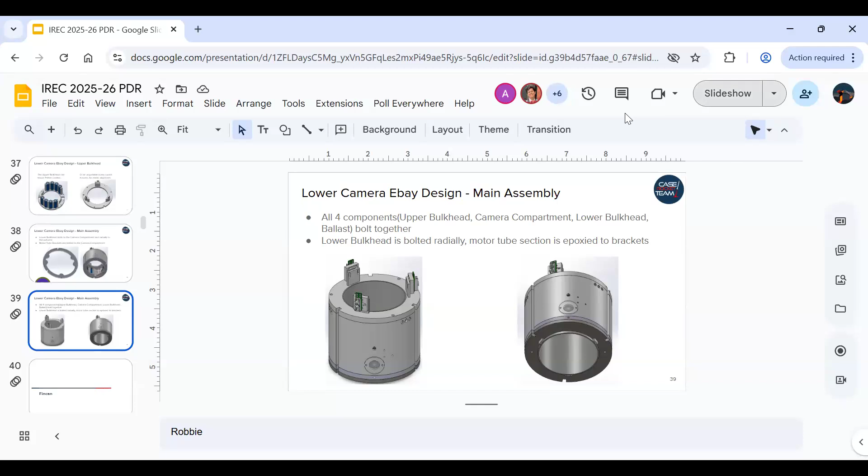Oh, just because the way it's big. Yeah, I can decide what you. Wait, let the color television. Why? You can click it with my laptop. Okay, so I'm still wait, if you join on your laptop, you also join here, right? Oh, okay. It's like oh, yeah, wait.

Okay, so this is a unique requirement. For those of you that don't know, we are now required to do shear modulus determination for our fins. So this is our plan of action for that. We are going to use the ASTM D7078, which is designed to determine shear modulus of composites. So pretty good for us. This is kind of a rough idea of what it looks like.

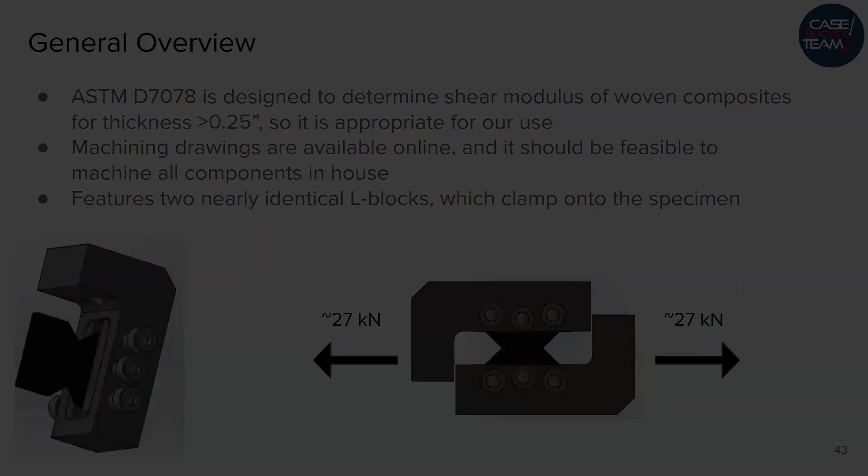And then here are the required forces. Max force, load cell, machine, from some conditions. Anyway, so for a 0.35 inch thick specimen, rating force is 25.2 kilonewtons.

And then what we're going to do this with is the fins from last year - there's leftover carbon fiber plate, or carbon fiber layup, on top of the G10 sheet. We're going to use that because we would use a similar fin material this year. So we're going to use that, and then we'll do a layup on top of it, a thick slab of carbon fiber, in order to see which one is stronger, and then which one is stronger onto the rocket.

But as mentioned, it'll probably go away. Probably go away. All right. I don't know, I'm good, yeah. The height that everything's happening now.

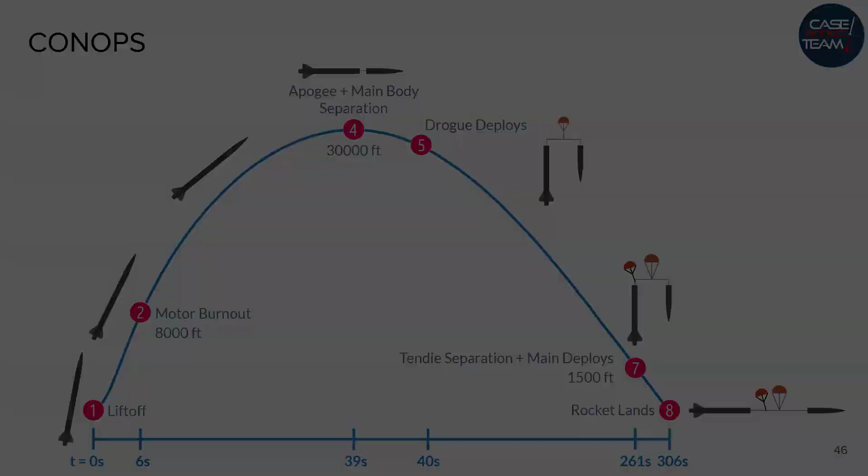Here's the recovery scheme. So it's gonna launch - that's what it's gonna look like, all one rocket. Then when it hits apogee, the floating charge is gonna pop open, shear pins are broken, nose cone's gonna come off, and then the drogue's gonna deploy, and then it's gonna descend to 1,500 feet. The tender descender, the EMAX and the tender, are gonna pop the ends out, releasing the main parachute. Then it'll have a safe landing.

Yeah, cool. So this is just basically the numbers of the flight. We have an apogee of 31,000-ish feet, going Mach 1.69, and 471 feet per second squared. The rest of the numbers you guys can read - I'm not going to read out every number.

One thing to note is in the DTEG, they now specify stability based on percent length of your rocket, not body calibers, because I think a lot of us are still very intuitive to body calibers. I did the conversion for you. So we'll go over this in the compliance matrix, but the minimum for supersonic flights is 10% and the maximum is 25%.

So we are within that. We actually end up having the opposite problem, because we were overstable and had to come down. But yeah, and this is also calculated based off OpenRocket - it's calculated based off no wind. That's how they said to do it, in the DTEG, how I said.

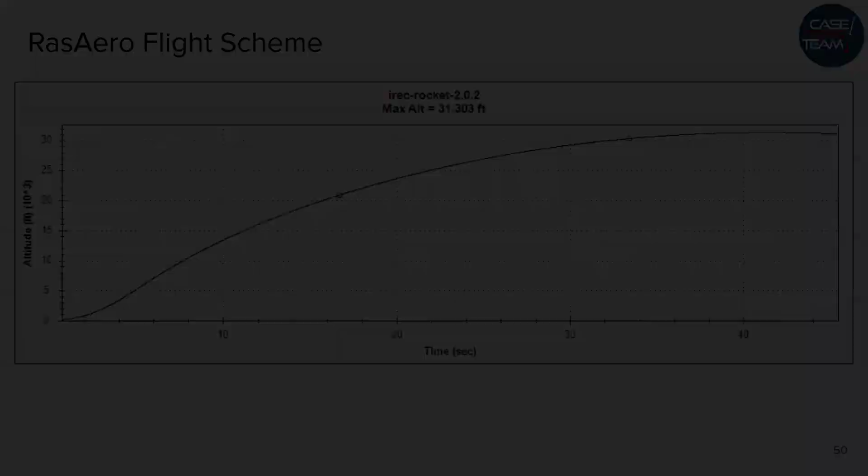This is gonna be a bunch of graphs. So this is all of the rocket's flight scheme, with wind - like accumulated Midland with all of the averages of June. This is the flight scheme: altitude, vertical velocity, vertical acceleration. I'll let you look at it for a sec. Then this is OpenRocket - the altitude from OpenRocket, the velocity, and the acceleration.

Fin flutter calcs, these are the inputs. The main takeaway is we have a 1.58. These are the inputs, you want to stare at them for a sec. The semi-span is calculated based off of, we say off into 6 inches, but because the boat tail is slanted, it's 6 inches plus whatever the slant is gonna be, so we calculate based off of the maximum value that it could be. So it's 6.828.

But yeah, these are our inputs. Go back. Anything specific to me go?

Before I continue, the main takeaway is we have a factor of safety of 1.58, which our minimum required is 1.5, so we're chilling on fin flutter. Hopefully. No, we're chilling on fin flutter, don't worry about it.

We also have more fin analysis. This is CN alpha - I realized in putting this out we didn't explain what CN alpha was on a full slide, so here's the slide view. It's basically the slope of thought - CN alpha versus the angle of attack. It quantifies the magnitude of restoring force the fin gives based off of how steep your angle of attack is, like how the force is pushed back.

A larger value is preferred since we want to be able to push the rocket back up to being straight. The general rule of thumb is vicinity above CN alpha of 10. The graph is CN alpha versus Mach number. We can see the graph here, and we are not going above Mach 2 or anything, so around halfway here we stop, and as you can see for all the Mach numbers we're gonna hit, you're above 10, so we're good.

Here's the dynamic pressure of the rocket. Maximum dynamic pressure, also known as max Q, is 140 kilopascals. This is important to know because this is where we think EOS went wrong last year. These are just graphs of dynamic pressure over time and dynamic pressure versus altitude, but I also have velocity at which we hit max Q. I'll stay on the slide for a second.

Hello. Alright, so the one tapping is here. Is that you, Karen?

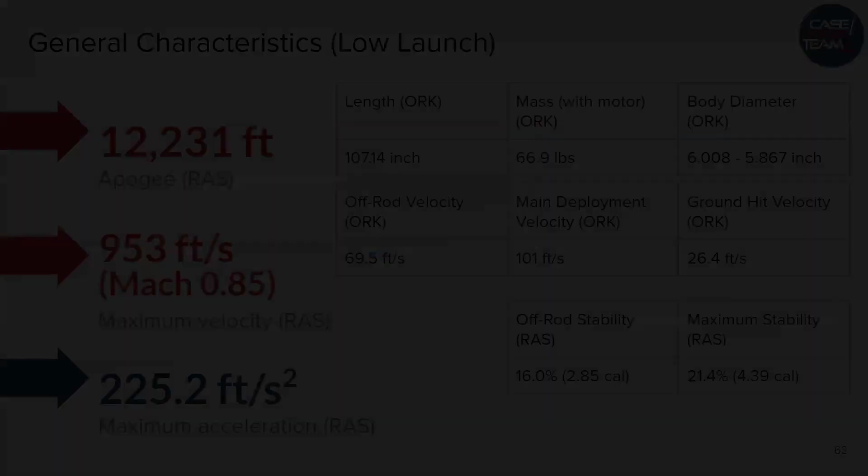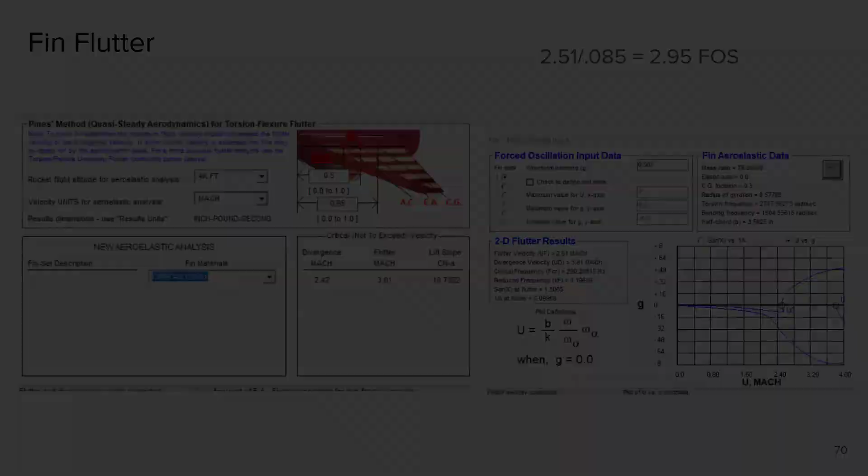I guess the factor of safety isn't calculated, but it's less, so. I know the factor of safety. You should have two, but it's always. But like, if you hit one, you get water, it doesn't matter, so.

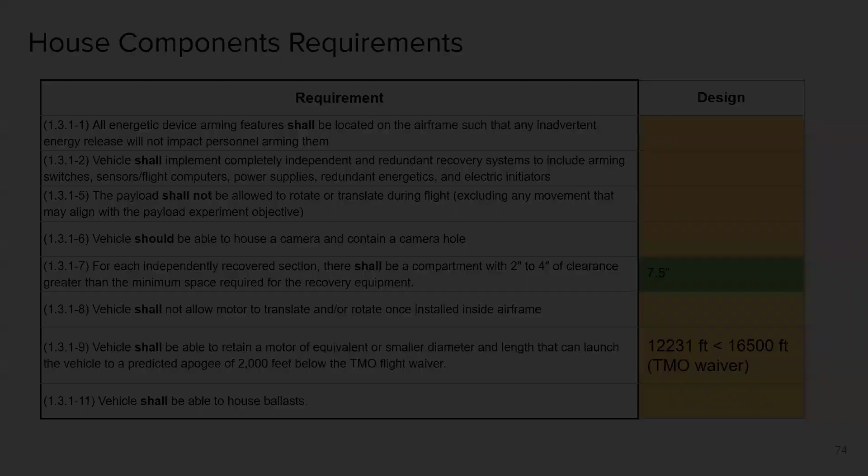The motor can't translate or rotate. Yeah. Both requirements, apogee is between what we're hoping to be reaching for at this moment, for both actual launch and for low launch.

These are the new DTEC requirements. The static stability margin does not exceed 18% of the length of the rocket. The maximum is not greater than 25%, and the minimum is not less than 10%. We're within requirements.

Recovery, we have a descent rate that is less than our maximum requirement. The descent rate of our drogue is good. All our things are within requirements, and you guys can read. We're all within requirements for recovery, and yes.

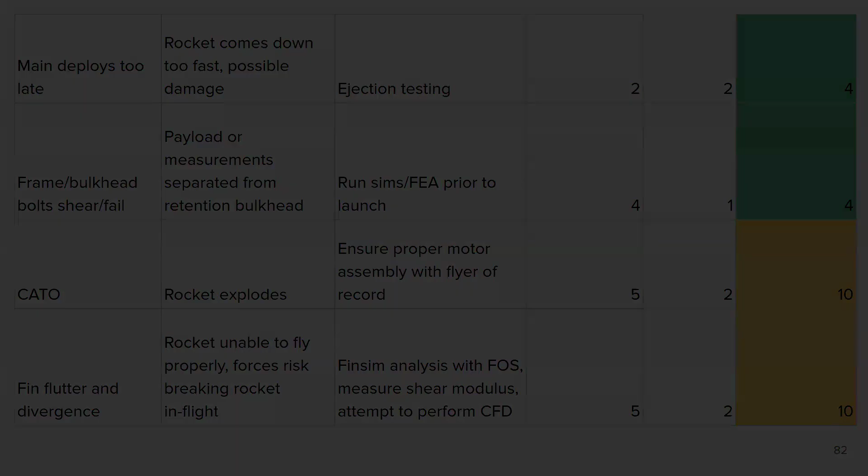But I think that's it for us.

Payload. So theory of operations for payload: the rocket launches, the accelerometers begin recording vibration data. The accelerometer outside of the damping polymer pocket will measure vibrations experienced by the payload body during ascent and descent. The accelerometer inside of the damping pocket will also measure these vibrations during ascent and descent. This data will be saved to an SD card, and upon recovery, the accelerometer data can be taken.

This is the dampening polymer. It's 2 layers of PPE that are interlinked, and then there's a viscous layer of basically plastic that's not linked, that will flow, and that's what actually does the dampening. It's like a rubber band, except it doesn't stretch back, so it can absorb all the energy.

Alright, basic CAD structure, each side of the payload, we have pictures of this on the next coming slides. Each side was CADed individually, assembled in SolidWorks. It's a puzzle piece model that allows for easier assembly, so the different pieces of the payload, top, bottom, and the sides are all bolted together.

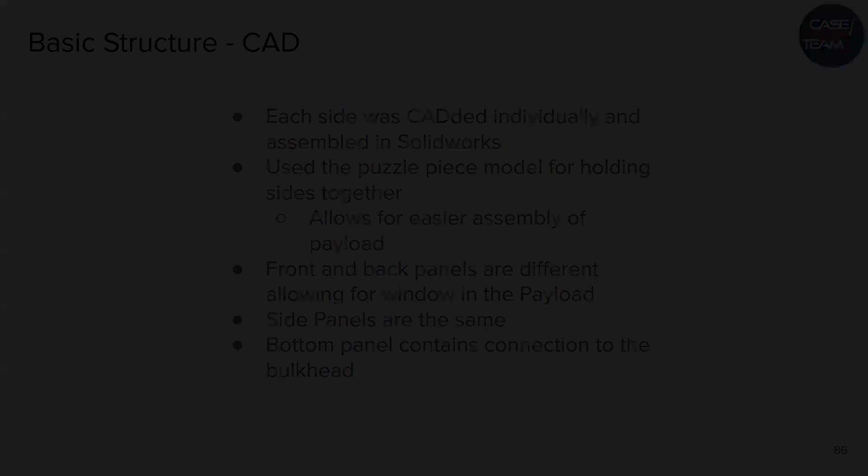The front and back panels of the payload are different, the side panels are the same, and the top and bottom are different to allow for the payload to be secured to the bulkhead, as we discussed in aerostructures. So there we have the top.

Alright, so we have the front panel. We have a view as if you were looking at the payload from the outside, and then the inside. Same thing for the back panel, and then the side panels, which are the same. The front and back panels have a little divot cut out, it doesn't go all the way through, it's just a dip, and that's where electronics are going to be secured. We're on that.

Yeah, so we're gonna use 6061 for the frame, and then we use PETG for a lot of the electronic stuff, like the voltage, the battery, accelerometers, and all that.

Alright, this is the external view of the payload model. It maintains a 3U CubeSat. Top and bottom dimensions are 3.94 by 3.94 with a 0.38-inch thickness. Side panel dimensions are 3.94 by 11.81 tall and 0.38 inches in thickness again.

Once again, connected puzzle piece method. The side and top panels fit together like a puzzle with a CubeSat shape, and they're all bolted together. We are still working to decide on the bolts that we're using.

So inside, there's a little more explaining later, but it's gonna have the two accelerometers. One of them's gonna be covered in a polymer, and the other one's just gonna be the bare accelerometer, and they're both gonna be in a PETG encasement on the bottom.

And above it, it's gonna be like a little sled that slides into the tube, that's gonna hold all of the microcontrollers and the breakout boards. And then there's two speakers above that connected to that.

So it's a little- you can see it come out, that's the piece that will slide in, that's all the chips that we're getting.

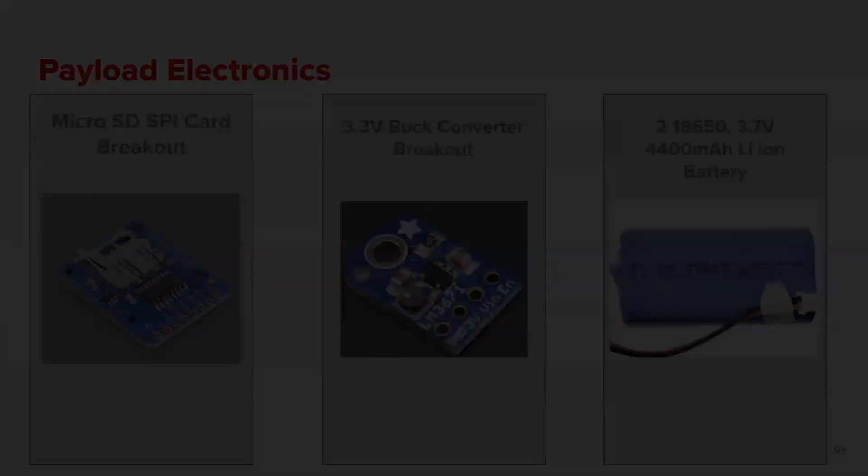So this is how it's gonna work: the batteries which connect to the buck converter, then that'll power the microcontrollers, then the accelerometers and data, the code, and the battery.

So this is a wiring diagram. You see everything's SPI, which is what...

Bulkhead connection: the payload, as was discussed by air vectors, will only connect to the lower bulkhead because there's a factor of safety of 30 from last year, and it survived the ballistic impact of last year. So based on that, we determined it only needs to be connected on one bulkhead. It'll be bolted to the lower bulkhead with bolts.

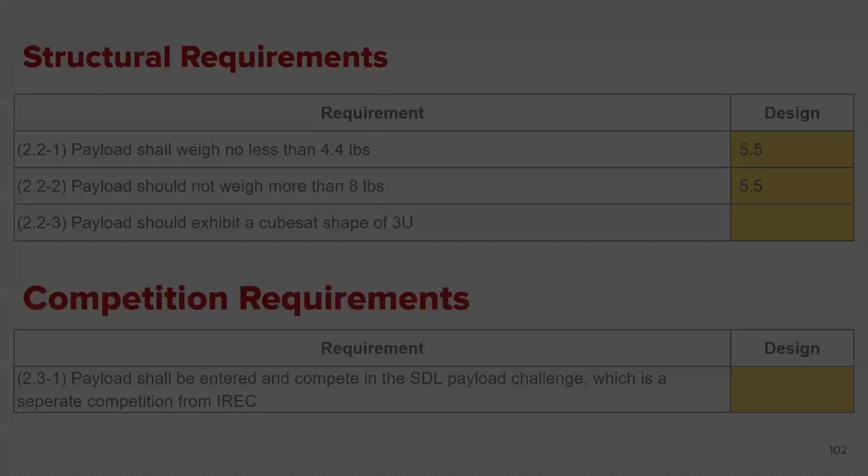Yeah, I mean, it'll be 5.5 pounds. The 5.5 pounds is the current weight. This is subject to change during mass.

Then recovery requirements: we're not using anything deployable. It's no more than one independent body, and we're not deploying it, so it doesn't really need CO2. All right.

Alright, well, so here's the presentation for the measured subsystem. So first we're going over what our eBay looks like. It's a lot different from how it looked like in Kodiak.

But what we're trying to go for now is a fully 3D printed eBay design, probably using PET-G, and we just keep connecting all of our components onto the surface here. So that's another big difference.

So I mentioned in Kodiak we're not using the logic anymore, so we're using an Arduino Nano as our main data acquisition device. We'll also be having an ADC, analog to digital converter, to convert the analog data from the strain gauges into a digital signal that will then go into the Arduino. We also have level shifters and a buck converter, which I'll get into and explain in our wiring diagram.

Okay, so just going over our eBay stability calculations, there's some math here which I pulled most from PC310, but the most important point is the factor of safety here, which I got a factor of safety of 89.

Okay, then this is another something I wanted to show that's not necessarily part of the eBay, but goes with where each strain gauge goes. So I've been talking about this component, it's the strain gauge module that has the strain gauge itself connected to a Wheatstone bridge with op amps on it just to clean up the data.

And so the main problem we wanted to solve was how do we actually connect this to the inner lining of the tube. And so what we came up with is a holder like this with a surface on the bottom that conforms to the tube that we could epoxy, probably using something like Scotch-Weld to epoxy to the tube. And then we just glue the strain gauge module onto the holder, where this holds other stuff so we can go to all the locations that we want to put strain gauges.

And so about where we want to put strain gauges, I was thinking of adding strain gauges in these four locations.

Like Robbie mentioned, or like President mentioned in their presentation, we'll be running wires along from our eBay over there to at least two locations below the body tube, one that's close to the thrust transfer bulkhead, and then one close to the fins. So we'll be having these bulkheads and centering rings accounted for with wires that will be running through.

And then we'll also be having strain gauges near the recovery bulkhead, at the separation point, and then we'll also be having strain gauges right below the nose cone bulkhead, so we'll have wire crossing the separation point.

Here are my specifications for why we want to put strain gauges in these locations. Nose cone eBay is just to measure the deformation of the nose cone, the first part of the object that sees that strain.

Recovery bulkhead is a more special location, since we're not considering strain gauges on the carbon fiber tubes, but actually on the bulkhead itself, just to measure how the bulkhead deforms when recovery deploys.

Thrust transfer bulkhead, since that is going to be radially bolted, we can strain gauge the carbon fiber tubes surrounding those radial bolts to see how the thrust transfer causes deformation in the carbon fiber.

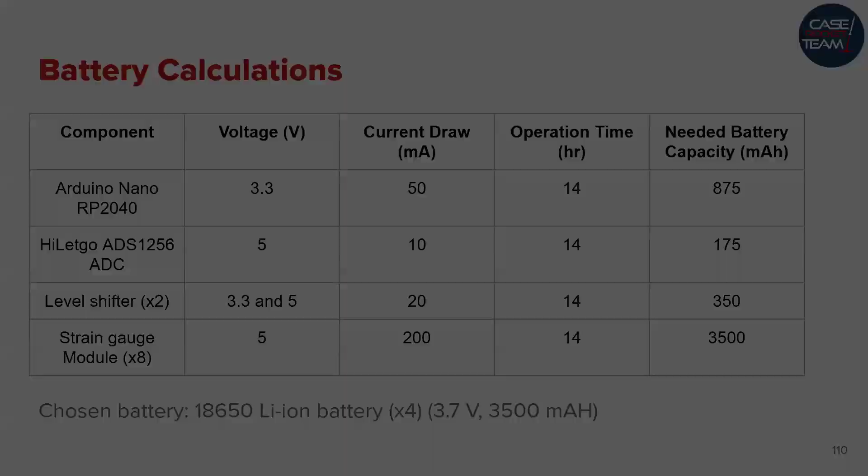Here's how exactly we want to use these batteries. The plan is, since we have 4 batteries, we'll have 2 pairs connected in series with each other. Each individual battery has 3.7 volts at 3,500 milliamp hours of capacity. When you connect them in series, you get double the voltage, 7.4 volts, but the battery capacity remains the same.

So one pair of these series-connected batteries can connect directly to the Arduino Nano, which can take in a voltage input of 7.4 volts, and all the components that require correction. The Arduino can then output 3.3 volts to all components that require 3.3 volts to run. The current draw we estimate the capacity needed to power all the 3.3 volt components is 1225 milliamp hours, so way below the 3500 available.

Then for the second pair, this will be used to power all the 5 volt components. Since the Arduino can't output 5 volts without extra components, we decided to use a buck converter. The buck converter will basically take that 7.4 volt input, spit out a 5 volt output, and in that process it actually increases the battery capacity.

All of these can be powered by 18650 lithium ion batteries, and the math on that is here. All of these are run at 3.7 volts. Most of the top components have pretty manageable current draws, so we can well extend beyond 24 hours lifetime. I'm going off the 14-hour window from the start of launch to the end of recovery.

Perhaps the biggest issue here is with Sirin S1R3. Testing on S1R2, we found it draws about 150 milliamps, which is manageable. We are unable at the moment to figure out the current draw for Sirin S1R3. I hypothesize it to be around 200 milliamps. I believe this is reasonable, but we'll have to wait until the board is sorted to finalize this. Given this, we are still well within the battery capacity, and we have room to upgrade, so it should go well. All these capacities are, of course, met by 18650s.

Here's the Sirin updates. We got the debugger, so we're able to actually write code to Sirin now. The GPS reorder was fulfilled just a couple of days ago.

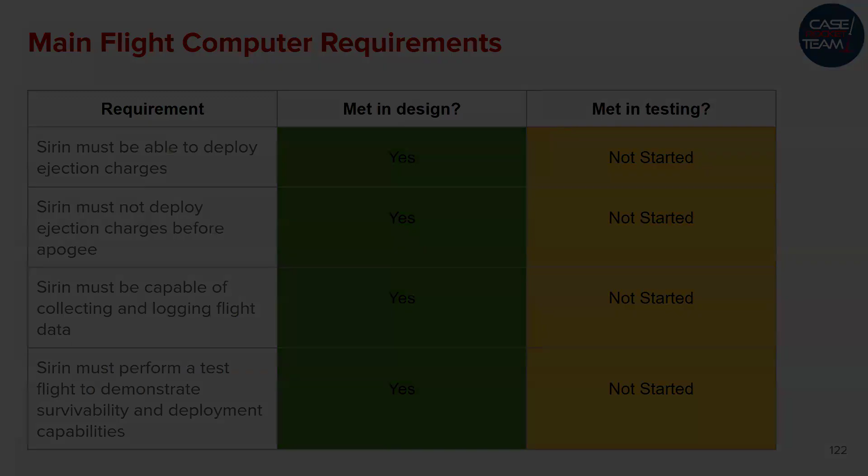I'd like to add on that last slide: all of that testing is absolutely essential for S1R3 to be the main flight computer of this rocket. We want to know it works and it won't blow up the rocket. So all that testing makes sense to do.

This is the plan for that testing in the order we plan to complete it. All of this is contingent on receiving S1R3 very soon. Once we do, we are first going to test the code that we know works—IMU, barometer—making sure we can actually log data.

This is just going to be pretty much hooking it up, powering it, running around, recording a quote-unquote flight based on that, and checking to make sure all the data lines up.

After that, we want to make sure it is capable of deployments this time. So this is just going to be using simulated flight data to run a flight, making sure the charges go off during apogee and at 100 feet.

Once we confirm this, we are suited to go on a test flight. This is going to be done by attaching Sirin to a modified L1 with an L2 motor. This will take us supersonic, making sure...

We are doing this because we are running out of time. We want to make sure this works.

The original plan was to go on a fully functional L2. I believe there are 2 L2s, maybe 3 currently. There are many L2s designed to work with Sirin on it, but this is to completely ensure that

Have you done, it doesn't seem like you've done FEA. We haven't, like, we've done preliminary FEA, just like checking everything's good. We'll present FEA. And 60-61 did not work. 70-75 gives us, we're gonna rerun FEA and double check specifically. 70-75 to use for now because it has a higher strength-to-weight ratio. So especially with everything above the CG, we want less weight, but we're gonna rerun FEA with both to do a better comparison.

You can get 60-61 instead of 70-75. It's cheaper, but we would probably need more of it, but we'll see. Yeah, we'll do cost comparison and also everything. We were gonna look into that further, this for now, because that's really.

I was just gonna say about 60-61, like the main issue, the reason why we switched over was because we had too much weight on top, it was actually too stable, so then that's why. You don't need like a fixture. That's why I'll do that.

Yeah, okay, next slide. Oh, Olive, Zoe has a question. No, it was first. Oh, it's the one, so instead of being a circle, they look like a little teardrop.

It's a teardrop shape instead of a circle. If you think about drag, it's gonna be better if it's teardrop rather than just hitting a circle. They look cool and reduce drag. Then you sand the edges so it's curved instead of boxy.

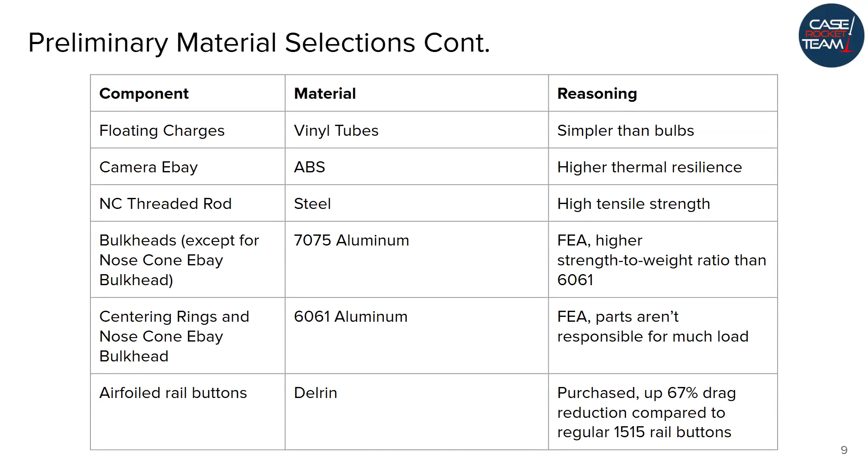I don't remember seeing anywhere in this presentation how recovery is actually packed. Arlo, can you give a 2-minute idea of how it was? Yeah, it was in PDR, but someone called it just a bunch of blobs.

The debag will have two parts. It'll be like a main debag with an extra bit of Kevlar on it to house the drogue, just so we don't have the problem of something wrapped in a fire blanket jiggling out and getting blown up. So, debag but bigger - that's how.

Anything else inside of that? I'll add a top view of how it interfaces, because like you said, it's hard to describe. You add a top view to describe it - just show the CAD. Yeah, the black boxes in CAD and the back, you probably always have to show the routes, but yeah, I get the vision and stuff.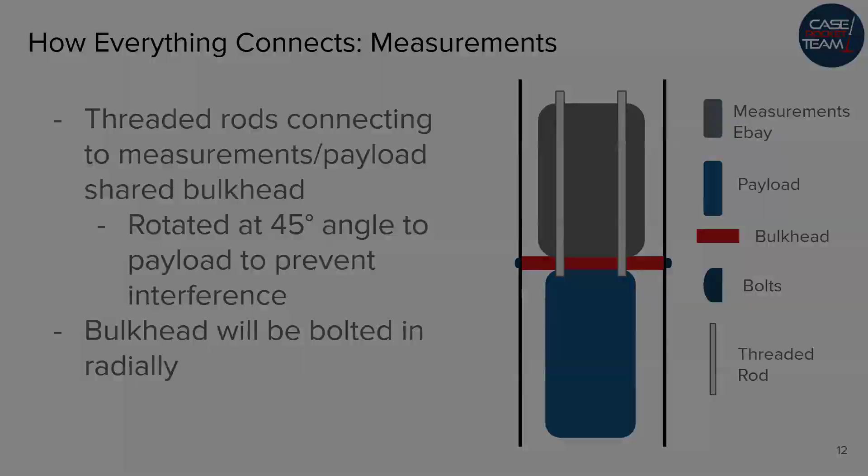Only 3 bolts. Did analysis, trying to use a spreadsheet.

This is the time to show the calculations you did for all your decisions. I didn't - it was more of a video thing. We just did preliminary, 3 bolts, we should now look more into it in the video. That's also fine.

Even if you don't show the math, if you figured out a reason for there to be 3 volts, tell us what bolts there are, because I assume you decided on what bolts they are - don't just say what bolts. Yeah, okay, I don't know if that was more of a choice, but that's fine.

Next slide. What is the connection between the thrust transfer bulkhead - the actual bulkhead - and the tubes? It's variable, yeah, I realized I didn't put that in. Anything else? Okay, next slide.

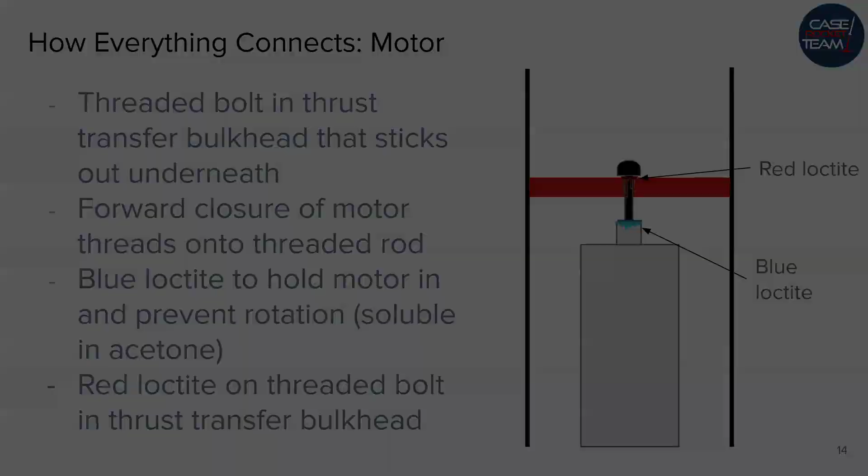My third comment is just that your tolerance note is interesting. And the other thing is, so you picked a von Karman 5-1 - why that over anything else? We looked at old papers and studies.

Did you also experiment with different length to diameter ratios? Not as much, so I could do that. That'd be a good thing.

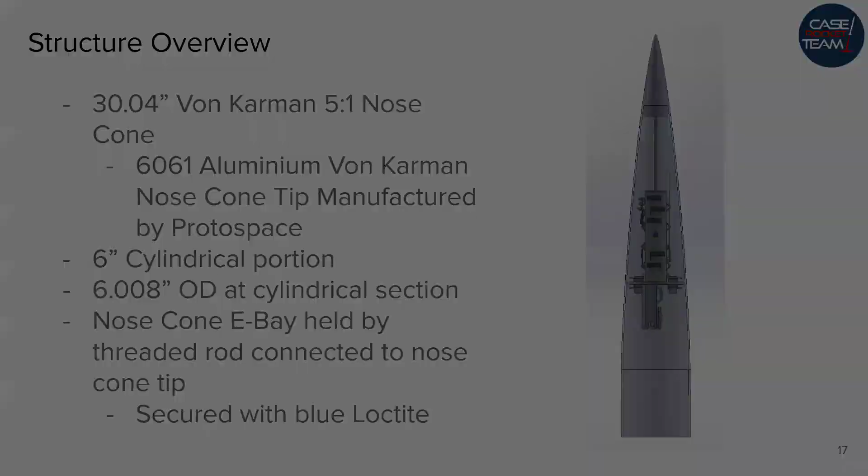Anything else on this slide? Next slide. Is there anything for these slides that you just brought straight in from last time?

Yes, there will be some heat set inserts. Write that down. Okay, so you don't have nuts or bolts or things yet. You said at the start you had like 20 different problems with this, or something.

There are notes that I'd like to implement too for a future design. That's correct. Can you say what both problems you've had with this as well as what you plan on continuing on the e-bay? Okay.

Now that we've sort of finalized what components are going in, it's still a little bit of an intelligent guess, but I want to confirm with avionics where all the ports are and what directions they face. Last year we had an issue where one of the flight computers had to be disengaged from the sled to plug it into a computer, and I want to make sure we don't have those issues.

Same thing goes for cable wire management grommet things. Those are where they are for now. They do not live there. I want to reposition them so I can route wires correctly.

We have to add a Siren antenna to that face, just to the left of Siren on the leftmost image. Right now there's just 2 cable wire management things because I want to zip tie that, but we don't know what the antenna is just yet, and we have some other frequency issues I'll get to later.

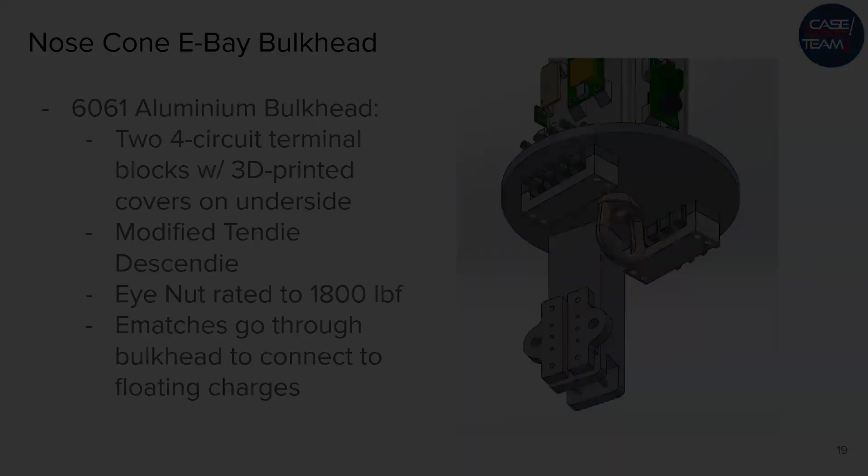Is the velocity component purely horizontal? It seems like a lot of the velocity... is that just what Open Rocket does? Okay, so is it purely horizontal? Well, yeah, because a lot like...

I'll have this later, but in the requirements thing, 164 feet per second is really close to 165, which is your requirement. That's not factoring in the fact that the rocket has drag, so if anything it'll be lower than that.

I could go to 26 inches, which would make my life easier, but we'd drift a hell of a lot more. We were bouncing back and forth because originally, 2 or 3 days ago, we were looking at the compliance matrix and we were at like 160, then 171, higher than that, so we just barely managed it.

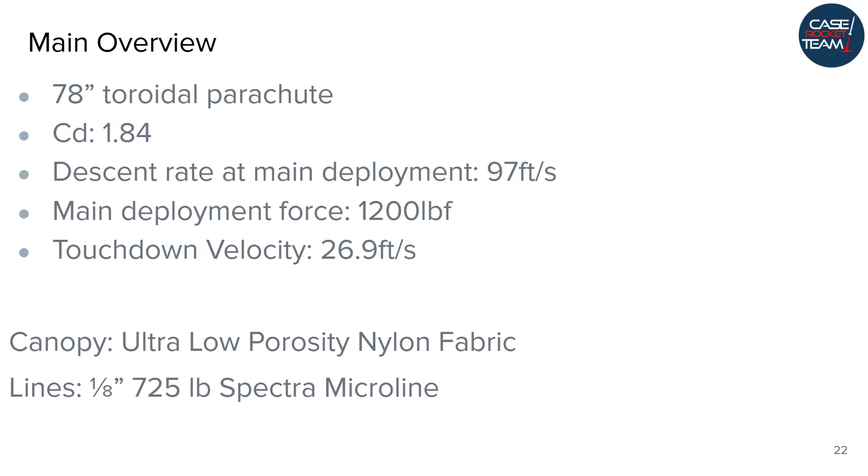For the thing where you list the max capacity, like it withstands 3,600 pounds, I think you want to also include based on what we actually expect to experience, here's our backup safety.

We don't know that yet because we don't know what the shock factor is. Right now it's just... we couldn't get a hard number, it's anywhere between 2 and 7. Well, state that but include it in the slide, I think, so that instead of me asking is that safe or not, you show the shock factor math.

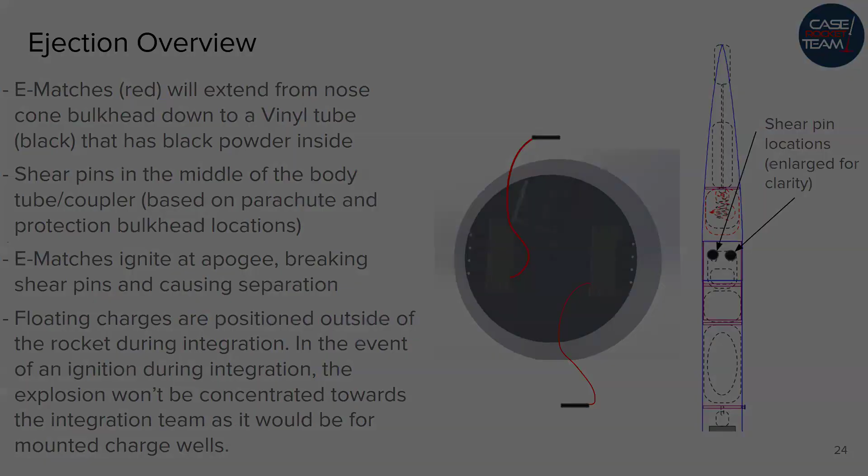Next slide. You're not gonna get parachutes done this year, it's just... We can try, but the CFD is not as critical to IREC as the drop test. The CFD is informed by the drop test because the drop test does different inflation amounts. So we have a plan to do it, and Chris is going to help out with that, but it's not super critical at the moment.

Do you have a general timeline for when you expect much of this to be done? Well, this green's already done. The recovery line parachute connection train test is kind of dependent on the rocket schedule and when the students went in. You said that would be a while. Yeah.

And then funny story, I was supposed to meet with VTOL about 50 minutes ago. Forgot.

Okay, well, next slide. Next slide.

Put this in the paper. I feel like the judges are gonna really... yeah, Arthur said it to me on the walk back. Yeah, put this in the paper. Well, no, actually, I was gonna say I'll write this stuff up now, so that when it comes time for writing the paper, you're not like 'oh god, what did I do,' just write it down.

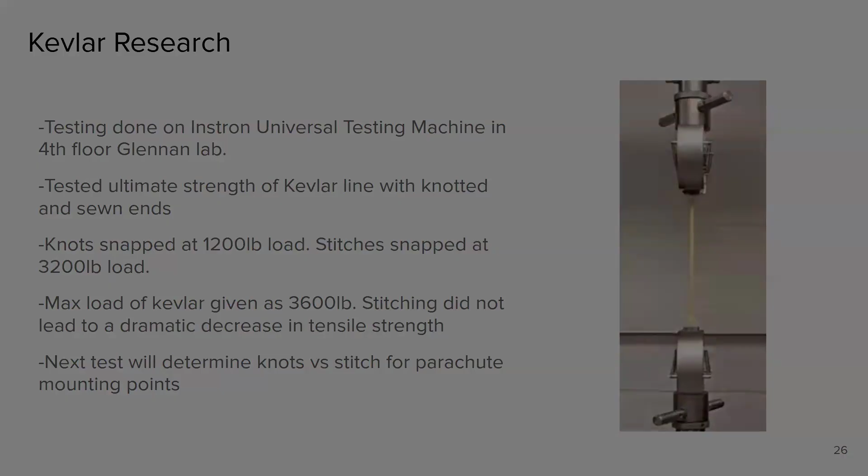That's slide 28. Okay, 28. Now we hear about the rail buttons - is it safe to sand them?

They recommend you do it. Okay, it's going. That part also takes like no force at all. Yeah, so you're sanding the part that doesn't... okay, yeah, practically you're at like 51%.

You want to make sure that before we build the test launch or whatever, that we put this on the rail in the bay and make sure those are lined up since they're not symmetric, otherwise I just know these will be off, just never getting on.

I would say there should be some actual specific plan about how to make sure these stay aligned vertical. I mean, I think they'll stay vertical once we get them vertical, but let's check it before we go out. Have a segment of rail that's just longer than that, so it's not unwieldy.

Yeah, and I think it's clearer later on, but I'm pretty sure you have those teardrops facing the wrong way in the CAD right now. Yeah, right. You have the pointy side up.

You can see one down here. No, yeah, it should be pointy side. It's on your side now. Yeah. Ouch.

Why do we have 2 cameras? To see more stuff, and because we can. Isn't the one upper looking up? Yeah, it's looking up. We operate up the chute and the other one looks out the permit. That's a much better answer than 'because we can.' Also, we have 2 camera eBays, so we actually have 5 cameras.

Now it's still better than... be quiet, it's down kind of separate, no I like that. Good, so the upper camera eBay, that's where the parachutes and whatever are, right? And that's near the separation point?

Yes. Are we at all concerned about when charges go off covering the cameras? Yeah, right here, same in the presentation. He's mentioning a different thing than covering the camera.

Wait, is that the last step of the ejection? Is that to see if the camera shields don't just blow up or delete themselves? I'm saying you can test both. Okay, that's true. I'm saying that if the camera shield is covered with residue, you can't see anything through the camera.

If you have like a piece of tape or something secured to any part of the recovery line, so that it gets pulled off of the camera shield. Sounds like a great way to lay a piece of tape over it. That's exactly what's going on.

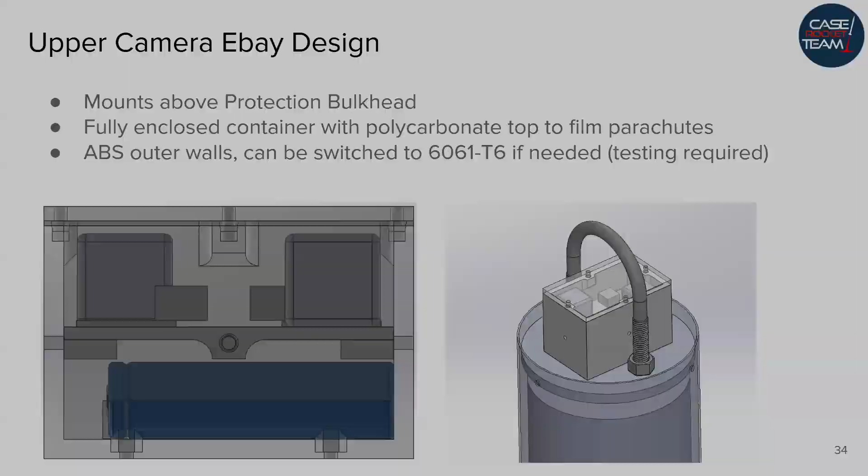You mentioned something about active cooling. So the current plan: you have your camera, the battery, and a boost converter for power. There's just a fan that's directly on it, so not really active cooling.

This is plan A. If it doesn't work, we're going to have some TEC coolers up here. We'd really prefer not to do that, that's a pain.

Yeah, you could go that route, cold side is fine, but your hot side is going to be really hot. And then also battery and boost converter for the fan.

So realistically, do you have a plan B? Even though you guys said that's not going to work — they told me it could be made to work. The current design would not work, because I really know how they function, but it could be made to work. The alternative is ugly but not broken. Correct. Also, you have active cooling, a fan that is active — so you do have active cooling.

Oh, dope, okay. Can we go back to slide 35 real quick? Yeah, sorry, I jumped everybody's screen choice. Yeah, okay, so you have—

Is there any reason your fans aren't just always on? Like every time it goes on the pad, if— Yeah, we're also not turning on the cameras on the pad.

Yes we are, they don't say that. So they won't be using the screw switch, but they will have a button to turn on — just holding both buttons. So these kind of need to be turned on at the pad, the fans kind of don't, based on running time. Okay, well, if you turn the cameras on at the pad, you can turn the fans on at the pad too.

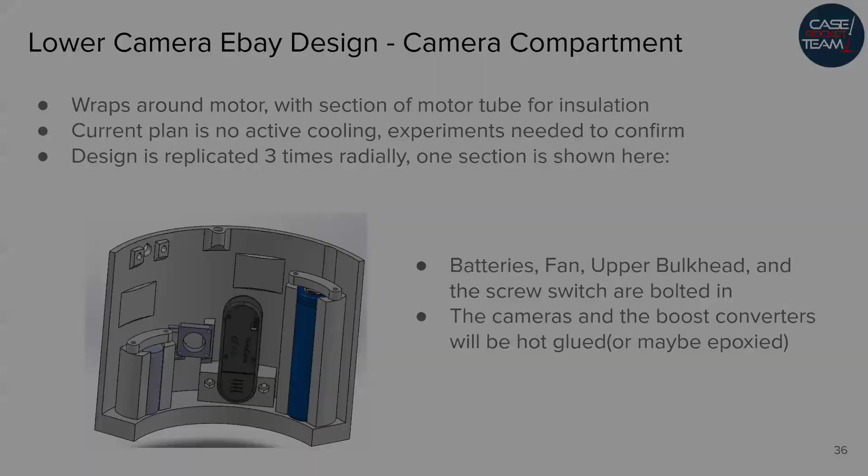Is there a fan, or is it just going to be blowing the hot air around inside that? There will be a number of holes, like for the screw switches and turning stuff on. I might also have a dedicated intake hole so the fan can draw in outside air to blow through, from a different section — from the trunk of the tube above or below. Yeah, but that's also inside the rocket, I think your point is more about accessing the outside air.

If you have a box with a fan in it and it's sealed, it doesn't really do anything. It will delay your camera, but if the issue is heat accumulation, it could still help. There will be a bunch of holes poked in the wall, so they should have enough. I think that's something we should just bake in there.

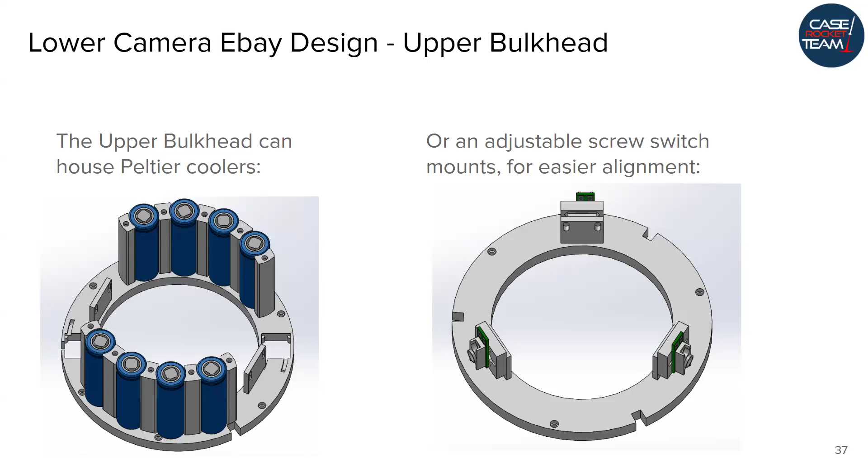Also increase your total by that. Make sure you roll those few things in. Okay, cool, next slide.

Anything for 41? 39, how big are these cutouts for the wires? Do we know how big the wires we have are? Yeah, I looked at this one, they are a quarter inch by a quarter inch, which is fine.

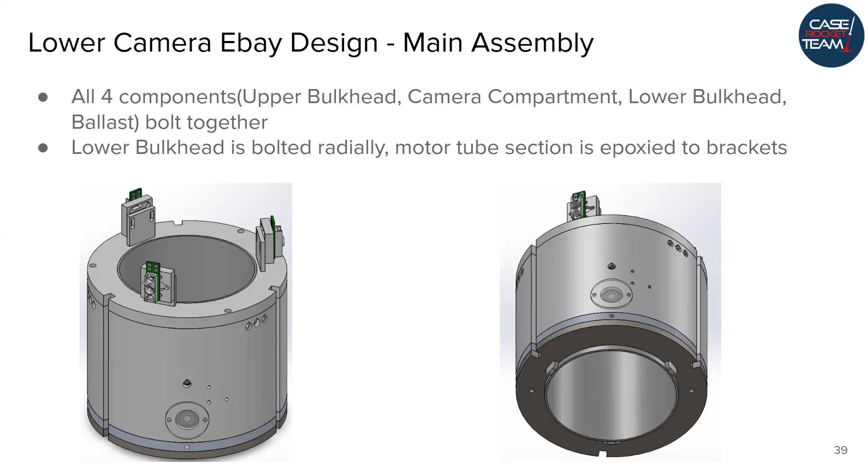The ones in the center rings and stuff are 0.5 diameter, but could we make those smaller? I think so, it just depends on what wires we're using. It also depends on the connector on the end of the wire that we use. Just make sure you double check that before you start. Okay, next slide.

Thanks, Ryan, you can see it, yeah.

44? What orientation of the fibers came to that specimen? They will be run like that and like that. When we did the layups, we do that specifically for that. Or the test specimen, I'm asking just what specimen. That makes sense, cool, next slide.

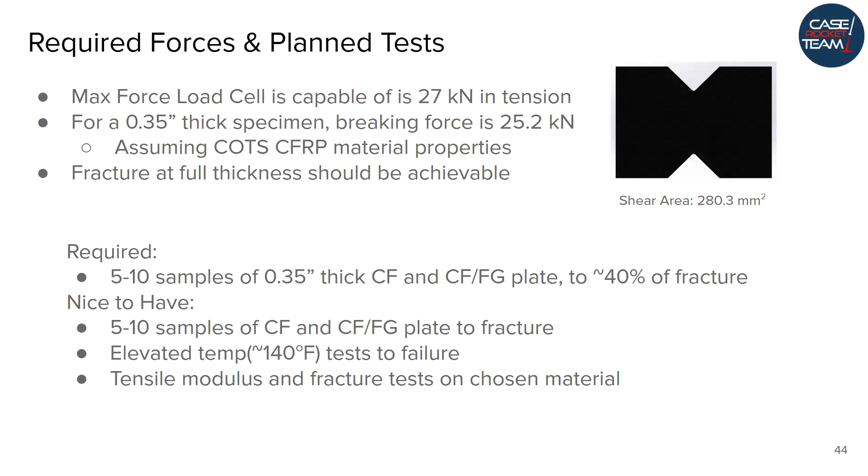48? 46. Your numbers are not what they are. No, well that, but also your average is not... oh, 30,000 feet. I don't know if your times are correct, the times I did check, and I don't know if your motor burnouts. Motor burnout being an exact 8,000 seems off, but we can, so.

Since it's about that, yes, actually -- your comment about sync things, I said just say approximately 8,000. My comment is just this should be... okay yeah, actually that's first.

Okay, anybody have anything for Sam? 48, was that one? Good job with the conversion stuff.

Is 31.3 with any ballast or anything? No ballast, if you don't count the temporary center. I think I want to see stability with wind and without wind. Wind's gonna be worse, isn't it? Partially, yeah, it'd be good to see. Part of the reason we were overstable is because Rob and I were originally simulating with wind, and they came out, it's like, no wind, so that. And then DTO was kind of...

For our internal purposes, we want it to be able to handle when there's wind. Like, if this is the number IREC wants, that's great, but we as a team should care about wind impacts.

Cool, next slide, I want to see simulation parameters for this. Next slide, number 4.

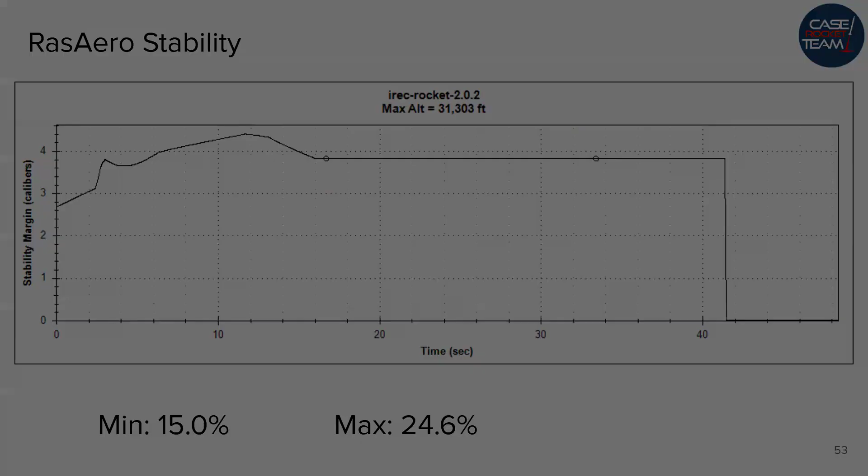You have your semi-span as 6 point something - 8 to 8. Does having a larger semi-span make your flutter better or worse? Worse. Okay, so this is your worst case measurement?

Why'd you pick that for the material? Because it's the worst case. There's 2 different carbon fiber reinforced plastic options in Sim, we just pick whichever looks worse, we look at both and pick whichever one gives the worst number. Once we have testing of the shear modulus, we can make it worse.

Did you test with the old material as well, as a fallback in the event that your planning ends up falling through? Like the past several years, to my understanding, we've used fiberglass sheet, carbon, and we've done like 7 mil fiberglass for testing.

Did you do a running of that simulation? I assume you also show it. Yeah, and this is always just the worst. We don't know - is this worse than your fallback, is my question. This is a different material than what we... if this is the number that gave the worst, this is what we should have. Is it the worst overall or the worst of the two? Double check that it's the worst overall, since we use something other than the two carbon fiber options.

What specifically does this tell us? This tells us where max Q occurs, the timing and stuff, used for flutter. And the graph is just nice to see, a good sanity check. It'll be nice to compare to the event horizon work that had a dynamic pressure of X. Yeah, this is good.

Wait, so is this new work? Yeah, eventually. Jake left, but Jake did a lot of it. But why was it to teach? Is it different? Well, it's good practice for the freshmen so they understand what they're doing. Also they do it differently.

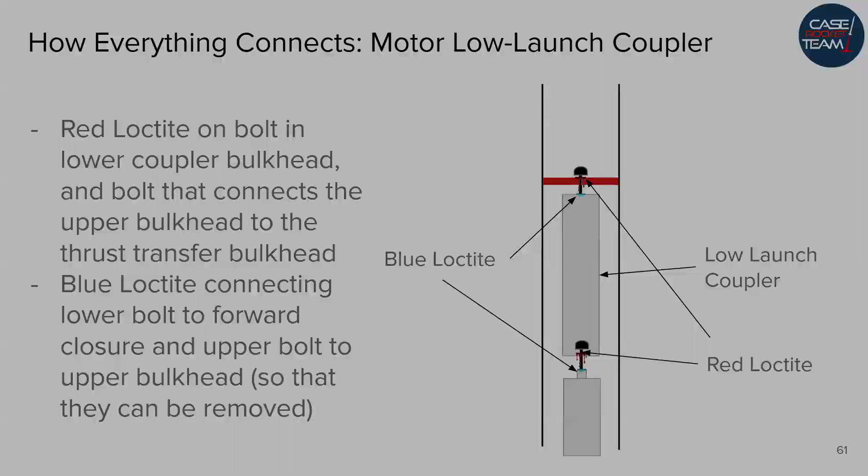80. No, if that takes us all the way to payload, Mackenzie is on her way. It does not, oh never mind, it's like the last one. This is low launch, yeah I know, but we got these for the normal ride. Let's go to 80, wait, nobody has an angle, let's go to 80.

No, wait, I thought it's... what do you got? First call, what's it called, 70, short.

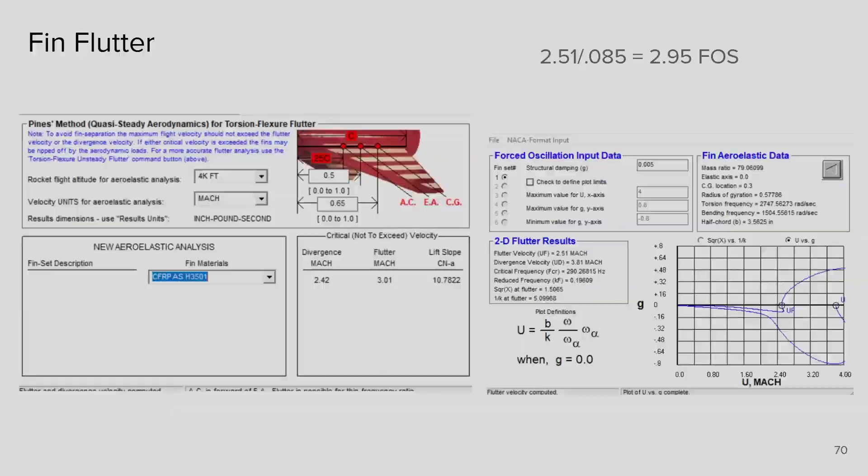I think it's 80 technically, but when you say ensure proper packing or whatever, how do you ensure that? I guess, like, have a plan, an integrated plan. Just like in that first one, a quick little description, like have a checklist, practice it, something like that, not just, like, oh, we do it.

I have also on this slide, when you say for bolts, shear fail, when you say run sims and FEA, don't do FEA on bolts, do hand calcs. I'm assuming you run the spreadsheet, I'm assuming you know that, but yeah, that's a thing.

Anything else? Woo! Yeah.

Mackenzie is on her way and would like to watch the payload section, so let's skip to measurements, which is around 102. We do avionics, sure.

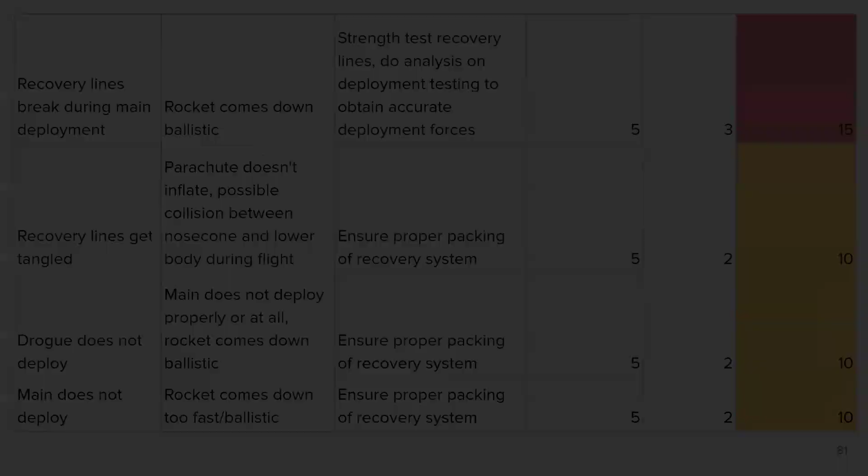I would say the most likely thing is that it comes out of the bag and it's angled. I think that is the most likely risk. Main doesn't fully inflate, it's much more likely that main deploys late. It'll probably either deploy or...

So on avionics, we're going to move to avionics. Oh, yeah.

What slide did they start on next? I'm looking that up. Do we need to go? Carly, do you know that you're taking that for this grade? Come on, what? I'm coming. Wait, are you guys playing sauce? What are they doing? We're doing CRT work, see.

Or all three? The easy mini is just like a backup altimeter, it's not broadcast, it's just that. But we will have three altimeters, the design has three altimeters.

Yes. So teammates not doing anything? Why are they? If you get... so one thing is like...

We have a plan for testing steering and whatnot, but worst case scenario, when that doesn't happen, there is easy mini, it's right there. But if steering were... it is also valid to consider that. Put it in, none of these are... why not?

Perfectly accurate, so they're going to give you 3 different numbers. If you have 3 numbers instead of 2, the one that is closest to 30K is probably closer. Also, I didn't think about that.

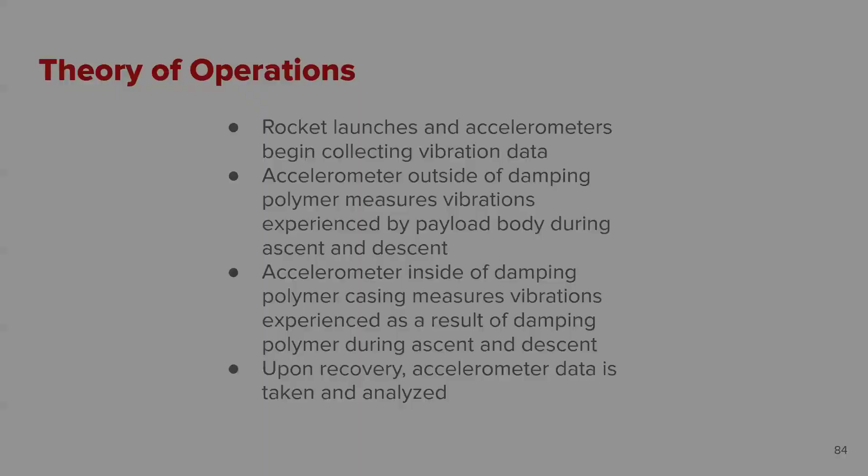So is this gonna be like this above and this below? Is it gonna be around both sides of the thing in that graph? Yes. I don't know how much you know and how much you will know.

A little bit more detail about what exactly these materials are would be great. It's like a TPE solid plastic layer. TPE is just thermoplastic elastomer, that's a giant class of materials. So if you can get a little bit more specifics about which one it is, that would be nice. If you know more about the plastic layer in the middle, that would be nice too. I don't know how much you know, or if they're not allowed to tell you everything, but more information about this would help.

Also, is the TPE a sizable amount of the thickness of this? Is this to scale? Is it like a 10% to 90% viscous layer? What is that? It can change depending on where you are.

But once you have the material, you'll know what it is. Be a little bit more specific about the thicknesses, maybe more material properties about it. This is kind of way out in the future, but you should probably have almost like a crash course on the properties of this, so that when you're talking to the judges you know what's going on. Also you might want to ask them to help you, from a polymer standpoint, to help price things up.

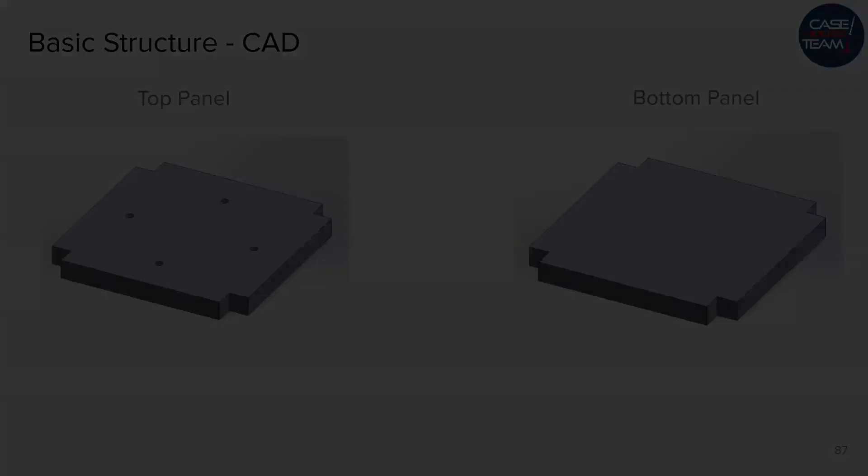Kenzie, do you want me to comment on any of these slides? For this one and the next couple, just having a picture of the assembly, making some stuff transparent, is more useful than individual parts. We need individual parts for detailed design and RFM stuff, but for this, just show the general structure of what you're thinking, and a better way to show the information you're trying to get across.

There are a lot of pieces like that, it's gonna be difficult in the middle, I think, but if it's sideways, I think it should be good. That was my only concern, just because there weren't any holes, so I was concerned for the side panels on the far right, you were putting them vertically down. They're shown better on a slide.

Although from what I remember, it's possible, because we drilled on it, so it is possible to fit that on. I thought we broke the machine. No, we didn't, we drilled holes to the top of the head, which is annoying, because they had to bolt the table to the ground, that's why that was.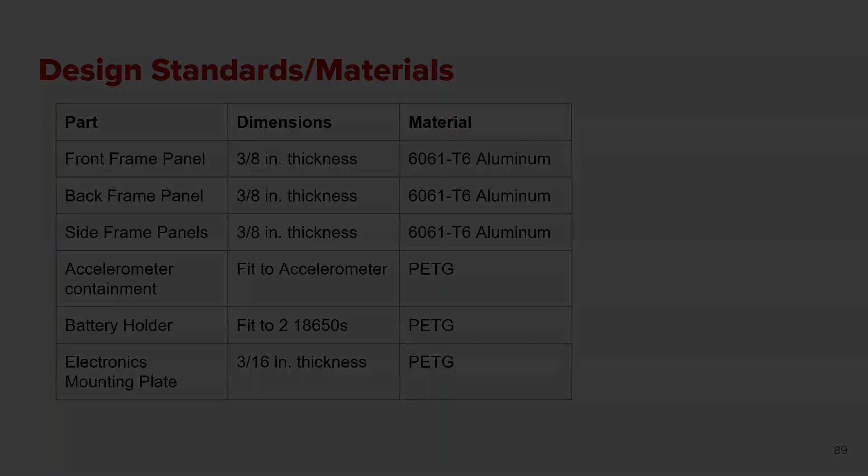Next question. Show this picture - yes, I mentioned it earlier, that's a good picture. I have a couple things.

I have a comment about the 3D print here instead of the previous slide, so thank you. That screw switch, which I think is that white thing up there, right, and that doesn't look center lined to me. I don't know if it's just perspective throwing me off, but check to make sure that's actually center lined on the part.

So if there's some way to rearrange it and get it down to the bottom, I would prefer that. It's like a failure mode you don't want, and it's really unfortunate.

You don't want another one. Right, which end of this is attached to the bulkhead? So the acceleration you're measuring is on the end of a payload that can wiggle around. Oh yeah, that's just totally good. So, do you want to, what's it? Yeah, probably.

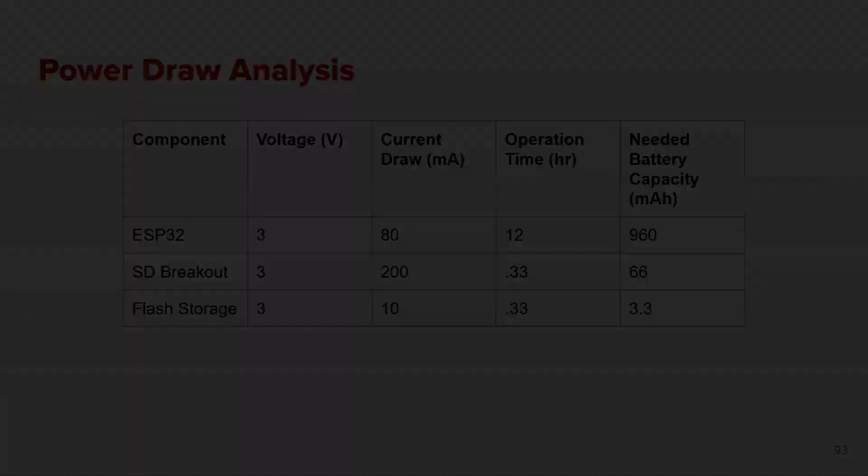No? There's a picture here. Yeah, print here, it goes. Print something, that's goofy. Print something to put a little bit of support on that other side. Because let's say you're coming down a little sideways and you hit the ground like this, that thing is very liable to just pick itself off the board and break in half, and you're having a bad day.

I'm thinking if you make a pocket for it, then secure it, it might help. You can also just print like a little C at the end, like, oh, and that'd do. Okay, like I said, you slide it in, just bolt it, it can't wiggle because it's in a thing, a pocket, carrot, you could say.

No, because we're creative with multiple sides. A pocket would be like this, you wouldn't have it around. Great, that is a big mistake. Anyway, next slide. It's like when I think of pocket.

I'm pretty sure all these are 3.3 volts, not 3, so it doesn't really affect much here, but put the right number on, please. Same comment I had for the avionics people, if you just have like an extra, okay, with our selected battery, what is our active time, so we can make sure that it works. Yeah. That, next slide.

Your accelerometers are kind of really important for this thing. Any amount of specs about them will be great. How much acceleration can they measure? Is it more than the max we'll see? What data rate can they do? And if they can only do like 100 hertz, that's probably not good.

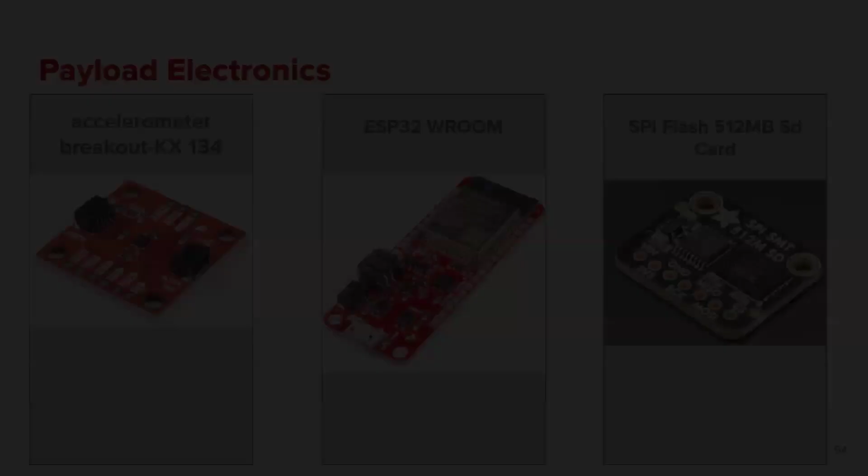So it's a special SD card that handles the voltages from the vibrations. And then at recovery, we're putting a TF card into the bridge. So you're recording to a different thing in flight, and then when we get it, we're going to put that data onto an actual SD card, something like that.

Go put it. Cool. Where are you hoping to buy an 18650 with 4400? That's a great question, I think that was... It looks like two in parallel. Yeah, double check that. That totally is, there's something about the battery being connected and then wrapped or something like that, that's silly, but I don't remember seeing that. Okay, then you get two in series.

Thank you. First figure is so funny. That's it, they don't—yeah.

This is the last slide, right?

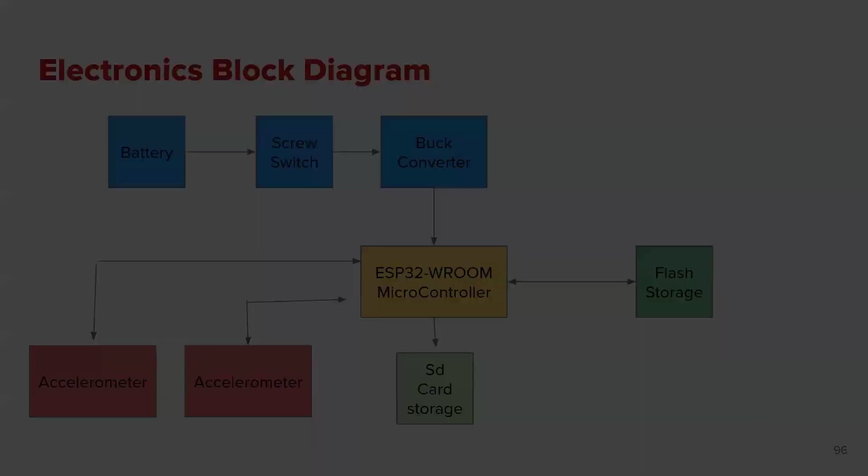No, I was going to say something else for your electronics—when you're planning out, I'm assuming you're going to rearrange some things, please keep in mind where stuff is connected. Because when you do your wire management later, you don't want to be, for example, your batteries need to be closest to your buck converter. So when you're rearranging it, please put it in an order that makes sense, so you're not stuck. This is from personal experience where I had to make extensions in places, and in a payload that's going to be moving, it's not the place to have sketchy connections with your JSTs. So just keep that in mind when placing things, making sure systematically it flows and stuff isn't reaching too far.

Okay. Anything else in payload at all? Fine. Oh, I have one actually.

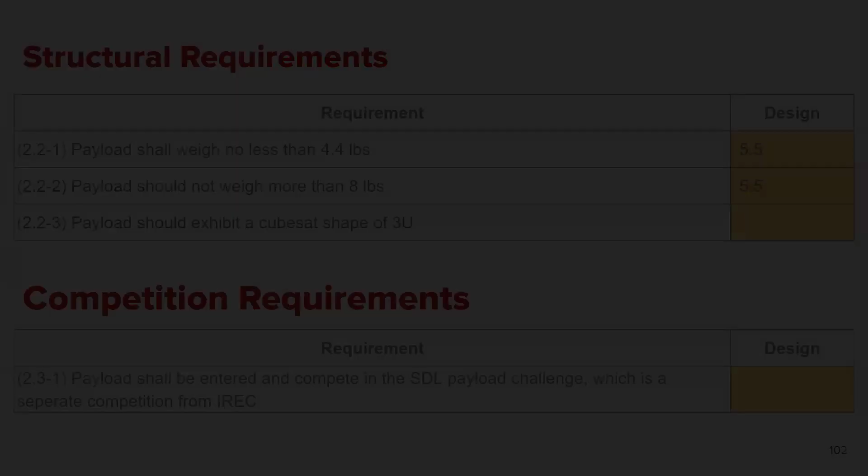Okay, start first in measurements. So, the normal eBay does this, you should do it too - those blocks you have coming out for the screws. Whatever the bottom face is gonna be when it's printing, just put a little slope on that so it prints nice.

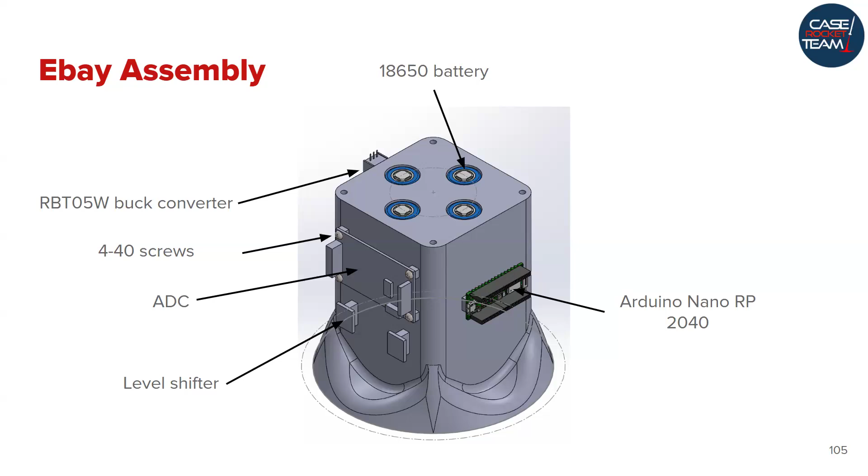Do your worst case scenario and then - also this is a best case scenario. Threaded rods will take most of your load. Yeah, I didn't mention it because it was a late addition, I didn't know y'all were doing that. Now that you're doing that, I would do the bending of a threaded rod, which is also more valid math.

How are you mounting these strain gauges to the tube? The strain gauge, oh like the actual, yeah, we need to get a special adhesive for that, there's a process for actually adding the strain gauges to the tubes. Regarding the actual adhesives, we did get a sponsorship from a company to give us a kit for adding strain gauges.

Which company is this? Micro Measurements. Okay, it's the one that hasn't come yet. Oh wait, according to that... But yeah, so we have a plan for how we actually want to do that, and it's something meant for this that isn't going to alter your readings by very much. Yeah, it's meant for- but like if you just set it also with CA, that's gonna affect your measurements because it's a different standard. Yeah, it's for carbon fiber.

Alright, good. Well, update the overall screenshot when you make it. Oh, you didn't have to do a screenshot. How is the uppermost strain gauge getting connected over the point of separation?

That's, what do you mean? Oh, that's the VGA cable. Oh, you should. Yeah, I'm sorry, that was... It's a connector, not VGA. VGA is the video standard.

Right, actually adding to that, also how you're going to go through the recovery bulkhead, given that there can't be holes in it. Yeah, that, alright, there's a lot of early conversation. Yeah, like...

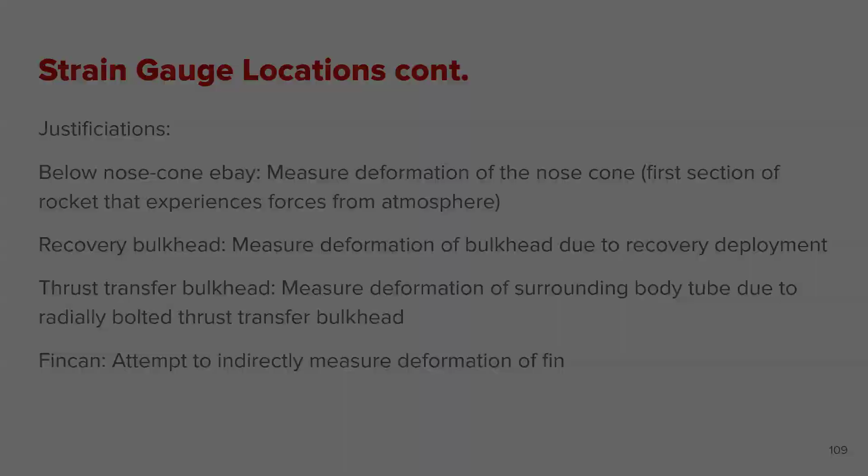Is that because of voltage conversion stuff? But not all of them. Well, no, because B is that, okay yeah. Oh, because 80%, 80%, okay, that makes sense. Oh, that was ours. Okay, that makes sense. Yeah, that's going to be a bit more explicit, but it's a little unclear.

When are we turning this stuff on? You connect it all, and it's on and recording data. So data is going to go into our unit but it's not going to get stored, it's just... I don't know what you call that. So everything is on when we integrate the rocket.

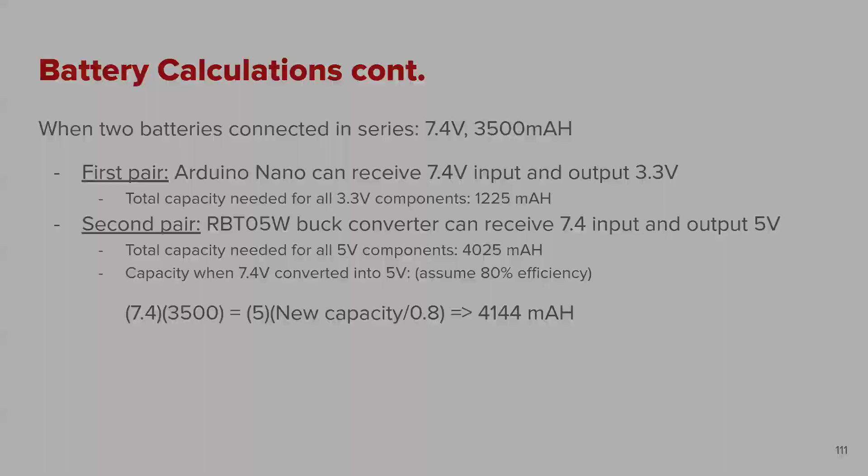Okay, next slide. Got a whole bunch of stuff connected. I talked to you earlier about this, but I want to see if anyone else knows the answer — same question applies to payload. I made comments on both of these slides, or a different one, but it applies here. You have a bunch of strain gauge modules, and you said each one is 200 milliamp max draw.

That's not each one, that's together. Oh, it's together? Yeah, each one is 25. You should clarify that. Okay, then clarify that. I asked Ryan if he was worried about the same stuff.

Wire gauge? No, I'm worried about overcurrent on the Nano, because the Nano has a max current it can handle. Talk about the Nano — it's connected to the Nano, which means that is the current that applies, through the level shifters for logic level. Regardless, you should check your components for max current, because overcurrent is a thing, and the Arduino has protection against it, which is good in most cases, but it's bad when it decides to turn the board off because of it.

How this circuit's laid out, that's not going to happen. I think the better thing to check would be how much current the analog-to-digital converter can handle. I'm saying check all components — I know the Nano does that, so check whether the ADC does that too. Check your max current. Great, alright, next slide.

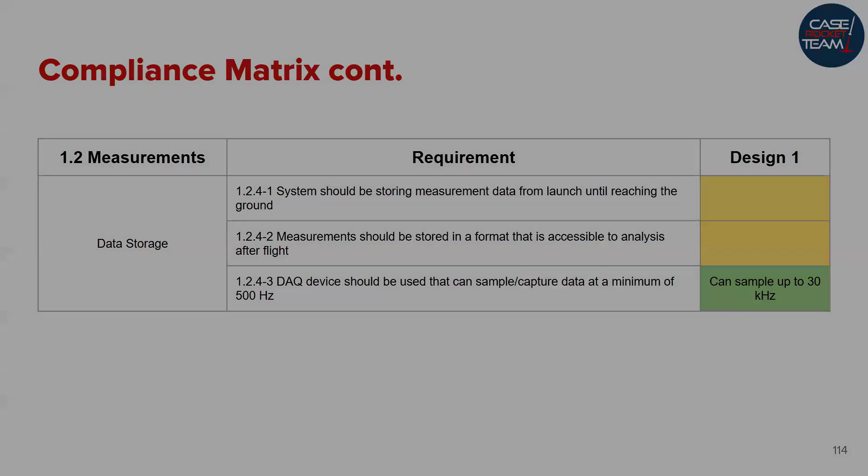Don't leave any Red Bull cans around. Yeah, you actually... I don't even know that I realized. You guys, that was good. Wait, like...